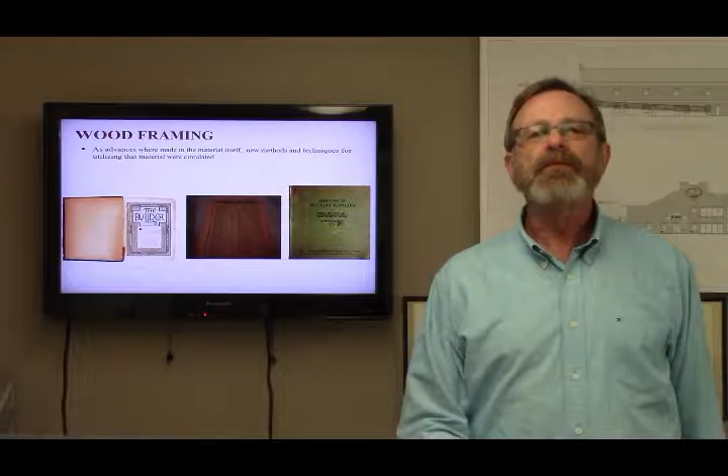As with most aspects of daily life at the time, the dissemination of information facilitated the advancement of many trades, including the building trades. In the building trade, the most widely adopted advancement was called balloon frame construction. However, while this adaptation had many advantages over more laborious and time-consuming building methods, it had one insurmountable drawback: an inherent design flaw which put its occupants in jeopardy.

Nonetheless, it is important to discuss balloon framing, as some structures still exist today. As building professionals, we need to be able to recognize the framing method and understand the implications of working around the potential hazards. Remember, it is our duty as licensed professionals to, above all else, including above the interests of our own clients, protect the health, safety, and welfare of the general public.

Just as an accountant uses mathematics as his language to communicate, chemists use formulas, and a mathematician uses equations, as building professionals we have our own vocabulary within which we need to be conversant. Today, we will speak the language of wood frame construction, with its own elements and descriptive notations.

There are a limited selection of woods which have the strength to live up to the stressing demands when incorporated into a building as a structural element. Not all trees are created equal.

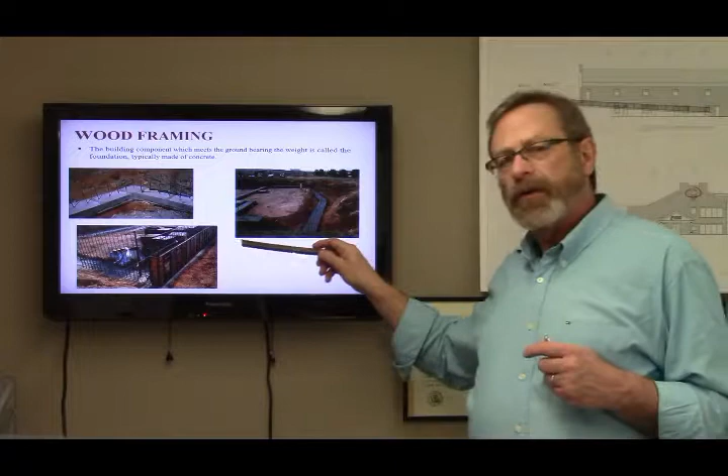You can see in these slides that there are reinforcing bars projecting out of the footings. They will tie in the foundation wall, whether it's of a basement or a cellar, or just a plain concrete slab on grade. These are the reinforcing bars we spoke about in an earlier module. They come in various lengths and are cut on the job after being positioned into the concrete before it is poured.

In our New York metropolitan area, the line in the ground below which the earth does not freeze is about 4 feet. So we see that the footings always have to go below the frost line, so they're not subject to heaving, pushing up, and settling, going down, with the fluctuation of temperatures, particularly in winter.

Here's this grid. It shows the grid of the reinforcing bars. They're set into where the concrete will be poured, at those points where the engineer has identified that there will be tension stresses on the concrete, and as we know, the concrete will not withstand much tensile stress.

If the excavation is also above the water table, the space excavated could be designed as good usable space. So here we see a basement. Here's the grade up here, and we've dug down below our frost line, but also enough to give us headroom in a basement, and we still haven't penetrated the water table.

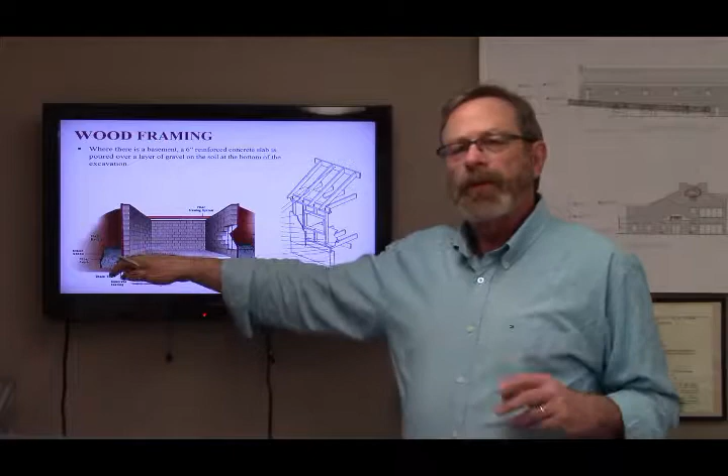The water table may be here. It may occasionally rise, and there are some drain tiles or drain pipe with perforation, which will allow that water to go into those weak areas and be brought away to an area below the level of the basement floor, so that the water, if any, could flow downhill because of gravity and then somewhere out into an open area where it will dissipate. Hopefully not into our neighbor's yard. That would be problematic.

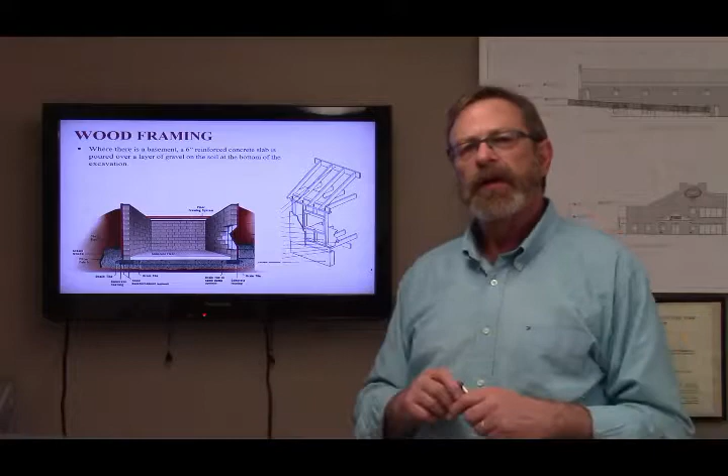You can see here that the concrete floor is sitting on undisturbed or virgin earth, which has been compacted over the ages by natural forces. The house structure itself, the exterior walls, are sitting on that foundation wall. These are the foundation walls, and they're sitting on the footing. The footing is giving the weight a little spread, maybe 2 feet, for heavier loads maybe more. The footing lies horizontally on the earth and absorbs the weight from above, dissipating it into the earth below. Those footings are concrete.

We talked about concrete being a combination of cement, water, and aggregate. Here you can see the aggregate is stone. This is typical concrete, maybe for a sidewalk or a foundation wall. Here's a piece of concrete where the aggregate is much more pronounced. Maybe the architect or designer was trying to make more of a statement, but they're much more visible, and they do have some kind of attractive expression of the compositional makeup of the concrete.

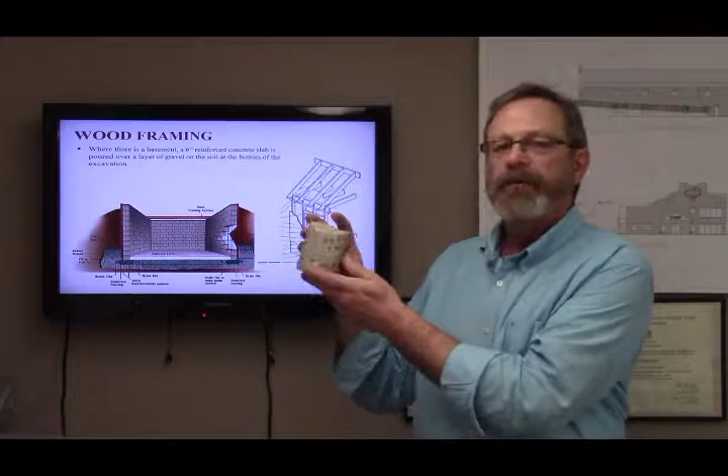Finally, I have a sample of a portion of a cylinder. We talked about those cylinder tests when we discussed concrete, and I wanted to show you this piece of a concrete testing cylinder that did fail ultimately. We were able to track from that the loading capacity of this concrete, that it met the engineer's specifications and our expectations. You can almost see that there was a piece of rebar here—it just left its mark indelibly into that concrete.

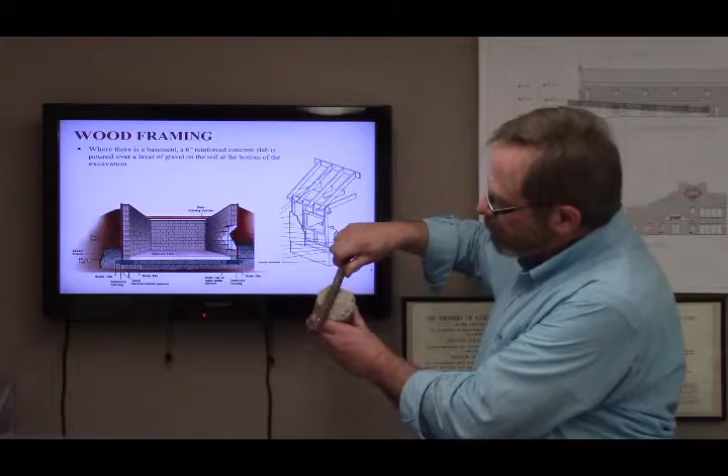He can also tell that this is undisturbed virgin earth, and then they start their excavation. He probably has some knowledge of the color of the earth being indicative of undisturbed earth. He may have also had a soil engineer come out and do some test borings or test digs to see what level the undisturbed earth could be expected at.

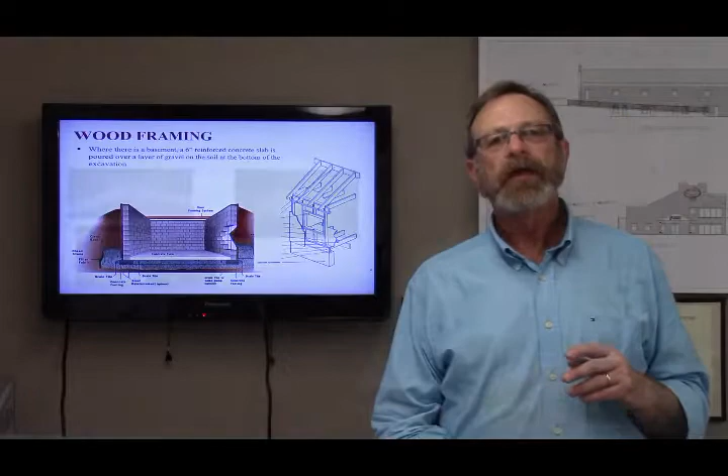At this point, the excavation has begun, and the ground where the footprint of the building will be located is leveled to the elevations that are needed. Once that field is level to just below where it needs to be to pour the footings and the concrete for the cellar or basement, the footing is framed up using wood members. The steel reinforcing bars are put in place, held by wire, and the first stage of the concrete pour for the house begins.

But once that foundation wall is poured above the footing and the height of the first floor is established, we install what's called a sill. The sill runs around the perimeter of the exterior of the building or house, and it's secured using anchor bolts or other types of straps to that foundation wall.

There's always included, before you put the wood sill plate on the concrete, a shield, whether it's styrofoam or metal—it's a wood-boring insect shield. It prohibits wood-boring insects from getting from the ground to that first piece of wood called the sill. We don't want any insects eating away at that sill; it would undermine the structure of the house. If those sills were to rot away, the house would start to lean to one side, and many older houses do have that as a problem.

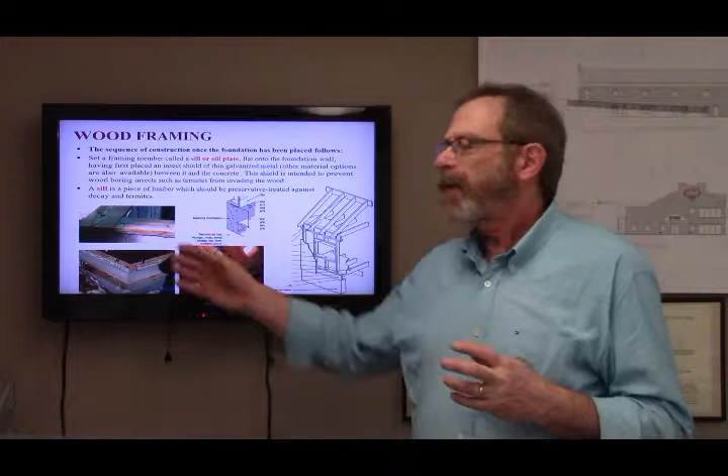Today we use what's called pressure-treated lumber. This means the lumber will remain unaffected by moisture that might be in the concrete from rain or driven wind. I'll show you here a sample of wood that's been rotted away—you can see it's pretty ugly and has lost its strength. We need to prevent that from happening, because the sill plate is what's going to hold the rest of the house securely down and in place.

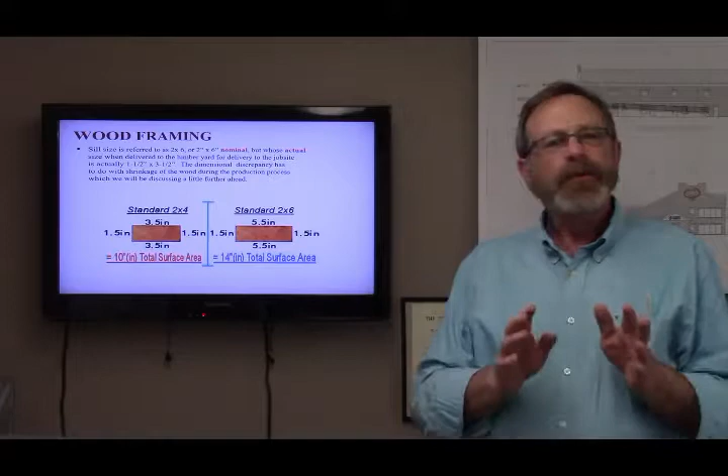We will be discussing wood shrinkage later in another module, but for now, because of the method of harvesting lumber as green or wet lumber, and the need for that moisture to be removed to stabilize the wood size, we have to account for the difference between the harvested actual wood size and the seasoned wood size.

Once the moisture is driven out of the wood, we call that seasoning, and because of the loss of moisture, the wood shrinks. So for now, let's say that when we harvest a standard 2x4, after it's seasoned, it becomes a 1.5 by 3.5 inch piece of wood.

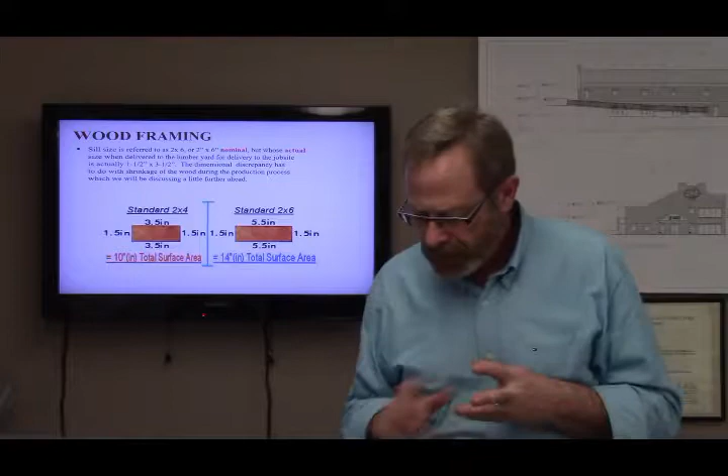We refer to it as a 2x4, but in reality, because that's the size that gets delivered to the job, we design around a 1.5 by 3.5. Here is what we call a 2x4, which comes in different lengths we'll discuss in the wood section in another module. But when it's harvested, this is a 2-inch dimension and this is a 4-inch dimension.

In the old days, that was what they would cut and harvest, and that's what would be delivered to the job. But the house or building, because of the shrinkage over time of the wood in dry weather, and then the expansion of the wood again in moist seasons, would cause the house to move, groan, swell and shrink. So there was movement, cracking of the plaster, expansions and contractions that became visible, jeopardizing the actual structure, and also very unsightly.

So we have what's known as a 2x4, actually being 1.5 by 3.5 for purposes of drawing and understanding how the construction goes together. We have a 2x6, which is actually 1.5 by 5.5, and different sizes after that. Here's a 2x10, it's actually 1.5 by 9.25. I say 9.25 because after a 2x8, the increase in shrinkage goes from a half inch to three quarters of an inch.

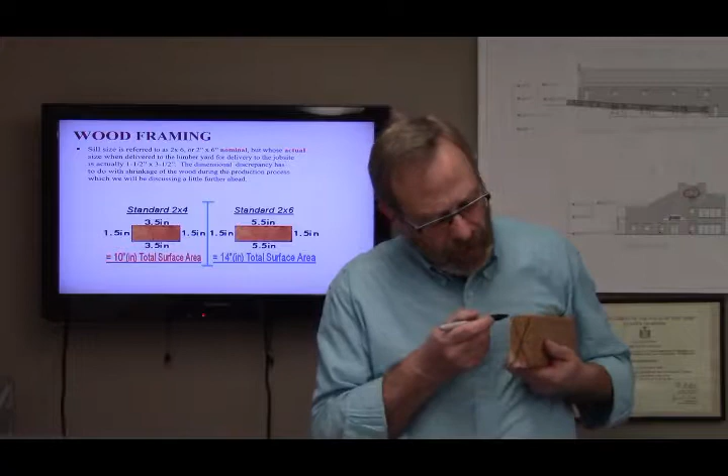So we take our drawing and mark an X at the end of it. That way we know that's the end of the material. We're looking at it in section, we're not just looking at something blank right here.

The same is true with other size lumbers. I don't know if you can see there's a red X here. So when we're looking at it face on, we're not just seeing four corners or four edges, but it makes sense that this is actually not a void, it's a solid.

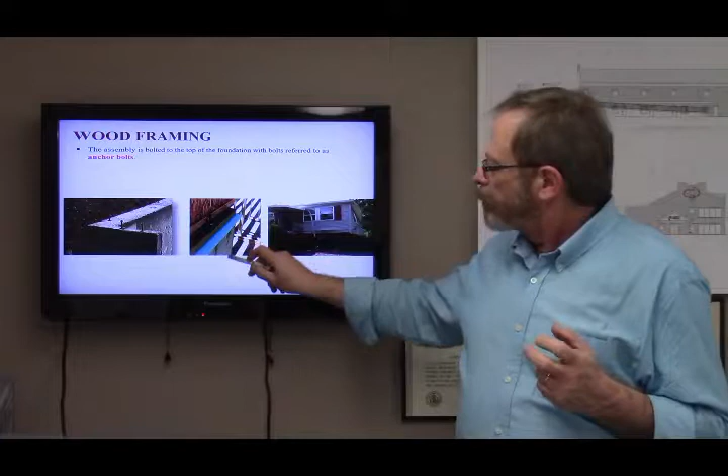Here's the foundation wall, here's that insect shield, here's the pressure treated sill plate, and here is the anchor bolt. There's a nut on the top there. That sill plate is secured down, and then the wood framing of the house is going to truly begin.

You can see here, this house has been literally blown off its foundation because the sill plate had rotted.

The sill plate is typically a 2x6, which we said was 1.5 by 5.5, laid flat on top of the concrete foundation wall. Where those anchor bolts occur in the concrete, we drill out a hole, typically a half inch, lay that in, the bolt goes through it, and the nut goes on top, and that's where the rest of our wood structure can rest. Here's the anchor bolt, here's the sill plate, here are the exterior walls.

It used to be, before the energy codes were developed in about the 1970s, that the plate around the perimeter of the house was only 2x4s. Here's a 2x4. But after the energy codes came into effect, we had to go with 2x6s, because the insulation required in the exterior walls to keep the house thermally protected could not fit in a 2x4 wall, only a 2x6 wall. So the sill plates became 2x6, and so too the studs that sit on them.

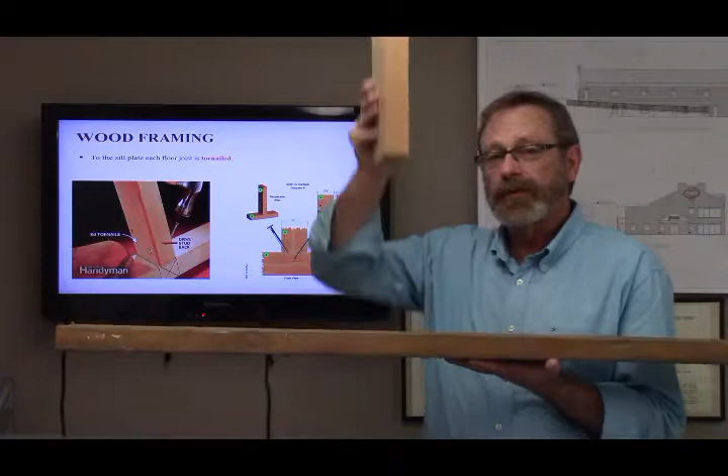On top of that sill plate, for the exterior wall, we put studs. The studs go upright and form the exterior skeleton of the house. The stud, which forms the wall, sits on the sill plate and is toe nailed in. This is how the toe nailing is done, nailing from each side.

A nail from each side is driven into the top of the studs at the plate above, because there's a top plate directly above the bottom plate, and into that stud through to the plate, whether it's the top plate or the bottom plate.

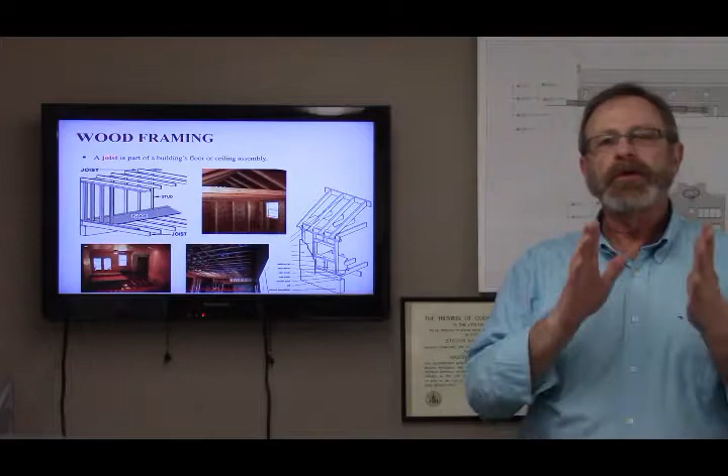So I mentioned sill plate, and I mentioned briefly studs, which I'll talk about a little more. I do want to jump though to the joist. The joist is a joist irrespective of the structural material it is made of, whether it's a truss, wood, steel, or concrete.

So our foundation wall, our sill plate, and sitting on the sill plate are the joists. The joists are the framing members that span from wall to wall, making either a floor or a ceiling. The ceiling can be the level below the attic, or it could be your first floor ceiling making the floor of the second floor.

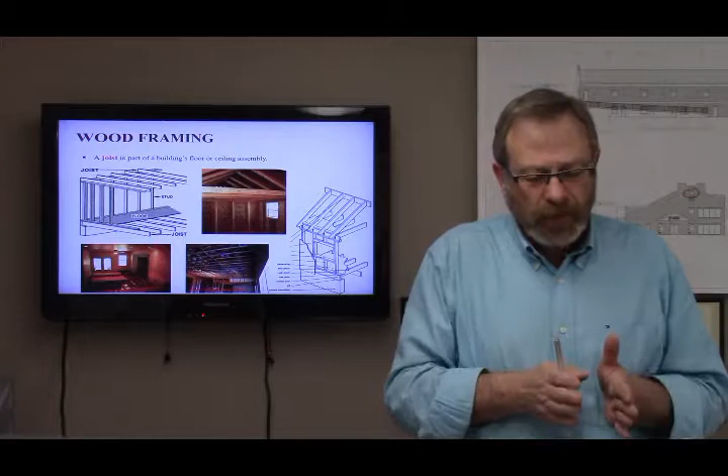Once our joists are in place, they're placed every 16 inches on center, 16-inch being a standard that everyone in the trade knows. 4 feet represents the size of gypsum wallboard as well as plywood. So if we space our joists every 16 inches, we'll be putting our gypsum board on the stud wall, or our plywood flooring onto a joist. If we center that piece of board in the middle of a stud or a joist, we've established a 16-inch rhythm.

So the board, gypsum or plywood—and plywood I'll talk about a little more, it's this striated wood you might be familiar with—will be able to share the first joist and screw down our plywood. 16 inches later, we'll screw our floor down again. 16 inches later, we have another place to screw our plywood down. And at the end of the third, 16 times 3, that's 48 inches.

We should hit another floor joist squarely in the center, so we can screw the edge of our gypsum board for the wall, or a piece of plywood, again 4 feet wide. We can always find the joist or the stud to screw into. So 16 inches on center, meaning on center of the object to which it's going to be screwed, is a common dimension that every tradesperson understands.

So here we see these floor joists. We know that they're all spanning from wall to wall, or wall to center span, where there might be a beam or a girder supporting the other end. 16 inches on center, and on the face of them, just on the outside edge of the sill plate, is toe-nailed a band. It's called a band, and you can see it here, which finishes the cavity ends of each of those floor joists.

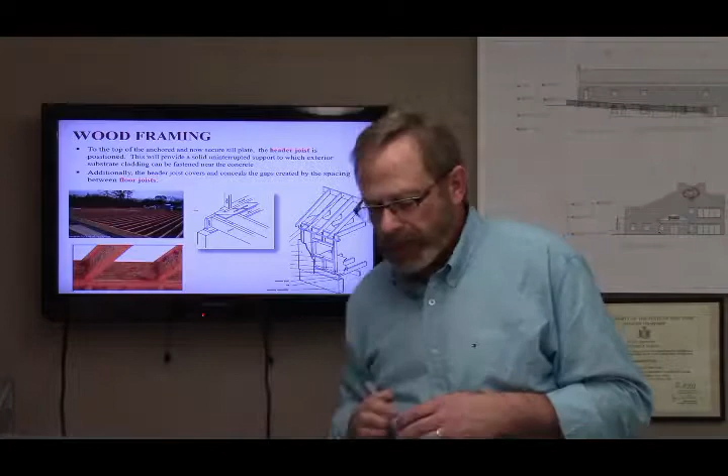So here's a good example. These joists are made up of wood I-beams—we talked about the I-beams. You can see here, if this is a 2x12, this also is similar in height, but we know that whereas this can only span maybe 15 feet clear span, this could maybe go 25 feet or 20 feet clear span for only a little extra depth.

So we can play our hand either way. If we don't care about the span so much, this is going to be less expensive. If we do care about the span, this is going to be only slightly more expensive. But if our design calls for openness, this is what we'll go with, because the other option won't give it to us. Our walls will have to be closer one to the next, or we'll have to have an intermediate column support.

Before I go on, I just want to show you in this diagram the foundation wall, the sill plate, the band, and the joists, all framing on that sill plate. And then this is now a platform for installing our subfloor.

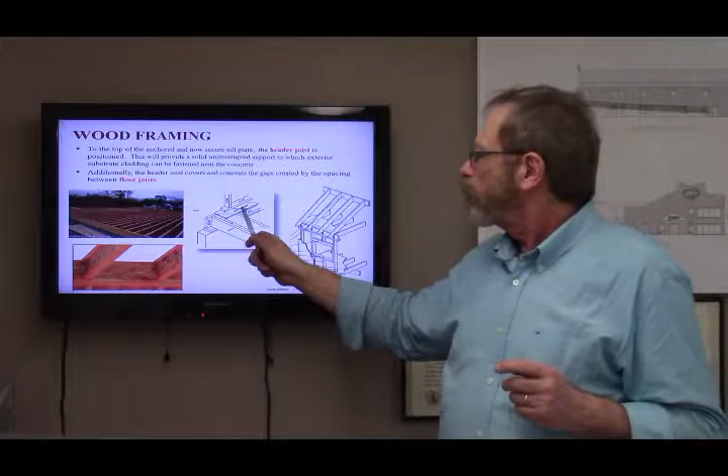Our subfloor is typically going to be an outdoor grade of plywood. Plywood is, again, an engineered type of wood where there are different layers of wood chips or shavings that are formulated under adhesive and pressure to be a superior wood material. In older houses, if you take the finished floor off—whether it's carpeting or some type of finished wood floor—you're going to see that the subfloor was made out of strips of lumber.

Not as good as today's materials, but certainly good. Depending on the condition of those subfloors, if you're doing a renovation, you might want to take up that subfloor altogether. We're going to see some pictures of rotted subfloors and where you would want to replace with modern material.

The word joist, just as our other vocabulary words we're being introduced to here, is a term of construction jargon. Whether it's made out of wood, whether it's made out of metal, whether it's a truss, they're all called joists. It's often desirable to have a space uninterrupted by support columns or walls, just a space of vast expanse.

Perhaps this is one of your clients' requests. In our crawl space, which I talked about earlier, we do have an intermediate post. We don't really care because nobody's occupying the crawl space.

So as I said, it's often desirable to have a space uninterrupted by support columns or walls, just a space, a vast expanse. Maybe we are having a living room or a great room. We just don't want any interruptions. So we use our engineered lumber for those greater lengths that we need.

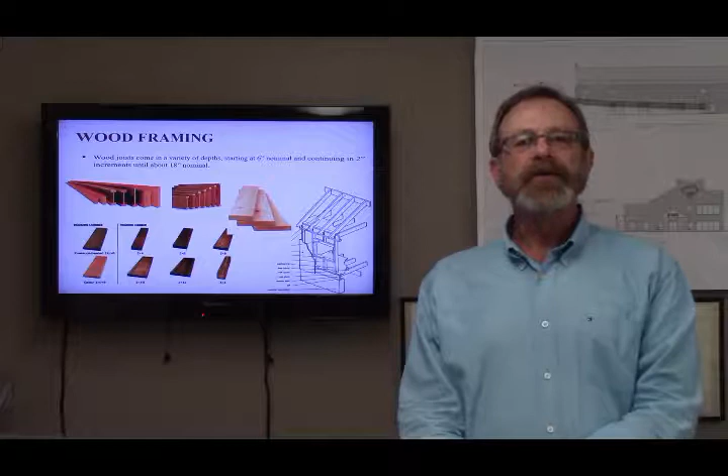Here's another example. If studs and joists are typically set 16 inch on center and a 2x is actually 1.5 inch wide, that leaves a cavity opening of 14.5 inches to accept the standard 15-inch wide insulation snugly. The insulation manufacturers understand this when they sought to establish the width of their product.

So I'm going to show you a piece of insulation. This is a nice piece of very manageable insulation. It's actually made out of recycled blue jeans. It's soft. They call this cotton armor.

We call this cotton armor. It's made, as I said, out of blue jeans, and it's eco-friendly. People can work with this with their hands and without a breathing mask. You're going to see some examples where other materials, such as fiberglass, are very unfriendly, feel terrible, need to work with gloves and face masks because you don't want to breathe in those fibers. Very scratchy, very itchy, very annoying.

I'd like to show you one more type of engineered lumber. This is called a glulam. It's basically standard pieces of lumber, like a 2x4, stacked one on top of the other. I hope you can see that. And glued together with an adhesive of superior strength.

This gives us another option for creating clear spans. And there are charts and calculations available and engineer reports as to how far some of these different types of manufactured lumber can span based upon their performance specification.

So let's continue through some of these slides. Here we see the wood available from the distributor. Your carpenter or yourself would go over, purchase the lengths of the material type that your job needs. You can see that many of the pieces may have some inherent imperfection.

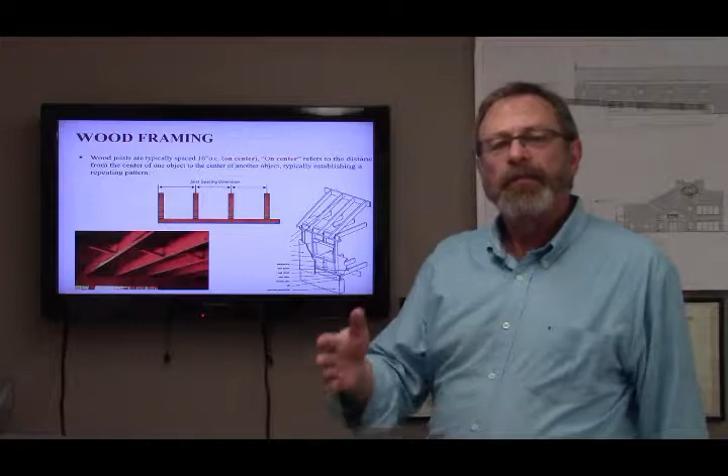That's a pattern that repeats. So when we talk about on center, we're actually establishing a rhythmic pattern. The longer the span, generally the deeper the joist, whether it's engineered lumber or regular lumber. The depth of the joist is what allows it to span the distance.

So when we have our joists 16 inches on center, or even our studs 16 inches on center, it creates the cavity. I told you before we could inset some insulation, but we could also inset ductwork, piping, plumbing, sewer pipe or water supply pipe, and wiring. Those cavities that are parallel to the joist are a great opportunity for insetting those mechanical systems.

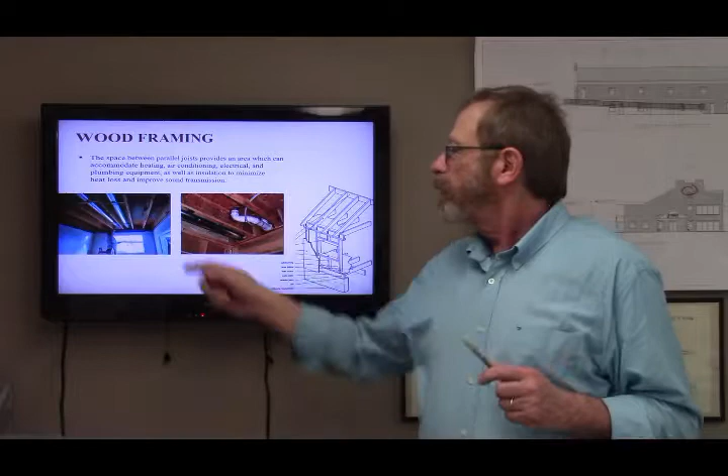What we said was that when we needed to go perpendicular to those joists, well, we have the neutral axis, so we can discuss with our engineers what amount of material might be removable so that we can run some of our systems perpendicular to those parallel cavities.

In addition to the sill plate or the girders on which our joists sit, we also have a code requirement of installing bridging. Bridging keeps the long lengths of the joist from twisting side to side. Bridging typically can be blocking, just a piece of board cut to the length of the cavity space, or cross bracing from another type of maybe smaller piece of lumber. Oftentimes they now have metal bridging.

So that joist layout will allow us now a working platform to start to build the rest of the house. The next step is to install the subfloor.

In older homes it might be strip planks side by side, but nowadays we use plywood. Plywood, as it comes in 4x8 sheets, is easily attached with today's use of a power actuated hammer, much like a shotgun. The carpenter's assistant puts in place a piece of plywood board.

Because of the system he's set up, 16 inches on center with the joists, he knows that as long as he puts his first plywood piece on half of the first joist, he only has to go every 16 inches on center. He doesn't even have to watch where the joists are, because basically they're hidden under the plywood—you can't really see them. But plywood boards do come with marks every 16 inches on center, so he can just follow the mark on the plywood.

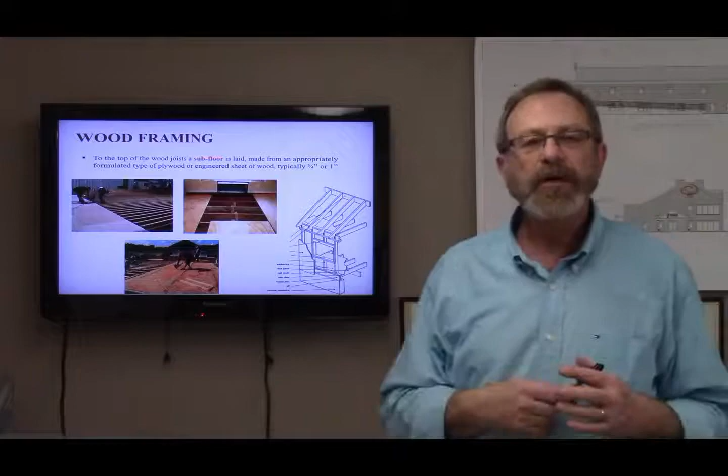Here they're laying down the pieces of plywood to do a good job so the plywood isn't going to squeak later as the subfloor.

The screws are really good because, for the same reason we talked about with screws and gypsum board earlier—but for the plywood they often use a glue caulk, put down first on the plywood, in order to secure it with more than just the screws. It makes a very strong bond, and if those screws were to become loose, there might otherwise be squeaking in the floor, and the glue would help nonetheless keep the plywood in place.

Here's a close-up of the power gun. We do have things that need to be left open in the floor, maybe a stairwell is going there, or pipe penetration, so it's easy to cut with a power saw.

Of course, there might be instances in the flooring where, because of penetrations that need to take place, the joists are sometimes not 16 inches on center. They might be less—generally they're not going to be more.

This is that chalk line I was talking about. This is a chalking tool. You put colored powder in there. One person stands on one end with the dumb end, as they call it, of the chalk line, and the other one holds the chalk reel itself. It's a snap—it's pulled taut, one guy here, one guy there, or sometimes they have a little hook so one person can do it themselves. You hold the chalk taut and you snap it.

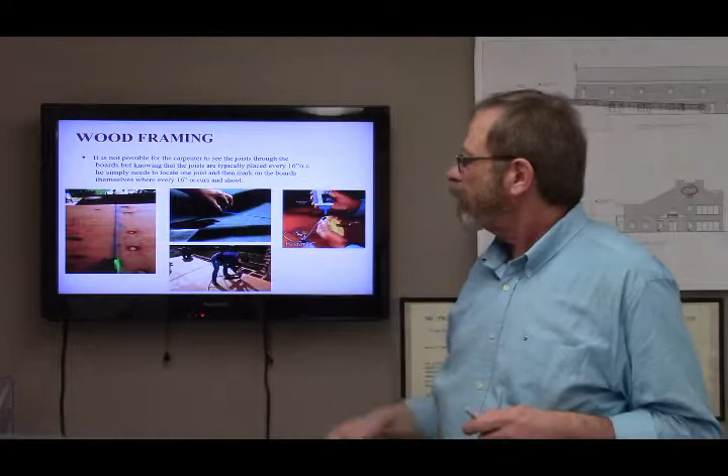Here's the guy snapping it. When it hits the plywood, it leaves a very light colored line, and that's the line the carpenter with the pneumatic tool is going to shoot that plywood into the joist at that location. I talked about subfloors in older homes which were just boards.

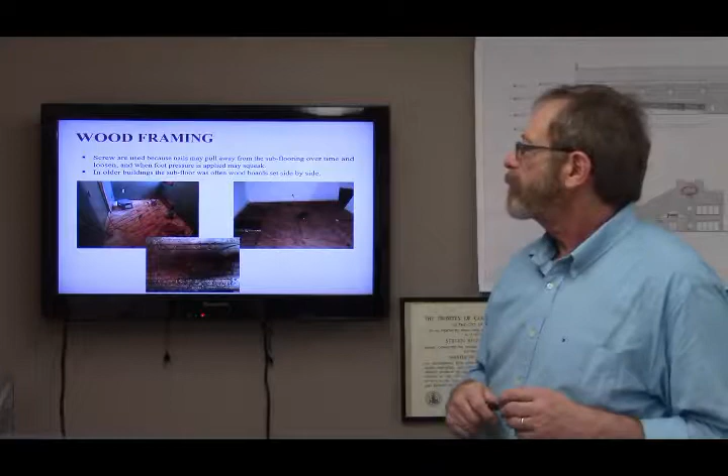Later to be covered with tile or carpet or some kind of finished floor. I wanted to show you that type of subfloor as well. In many worn locations, those boards might not be good anymore. Maybe this is an area under a bathtub that shows some wear, so you'd want to replace that.

You need a secure and stable subfloor on which to put your finished floor. So together with the joist, the subfloor becomes monolithic, acting as one large assembly. Oftentimes the plywood pieces might even come with tongue and groove edges. This is not plywood, but this is solid oak flooring, but they have tongue and groove. You can see the tongue and the groove, and they go snug one against the other. So in addition to the gluing and the nailing, this interlocking action helps the floor stay solid and keeps it from any movement and any possible rubbing or squeaking that would occur.

There is a 1/8 inch gap that is often recommended between the pieces of plywood, and even that is kept by that tongue and groove, which keeps a little distance for expansion and contraction of the plywood material itself. If it gets wet, it allows for slight expansion, because that plywood floor, before the rest of the house is there, is most likely subject to moisture, rain, or other humid conditions.

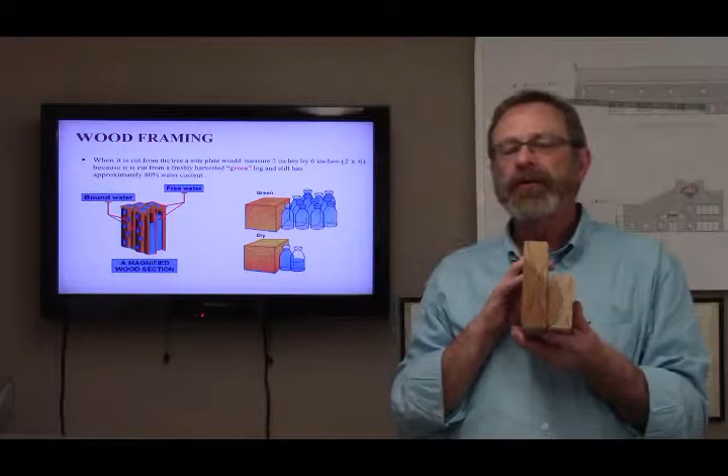I mentioned earlier about the moisture content of wood and the drying seasoning of that wood, accounting for the actual size of a 2x. We're going to call these pieces, whether 2x4, 2x6, 2x8, 2x10, or 2x12, simply 2x's, because for our purposes they will already be in place. It doesn't matter whether they're 2x6s or 2x10s, so we're just going to notate them on our drawings as 2x's.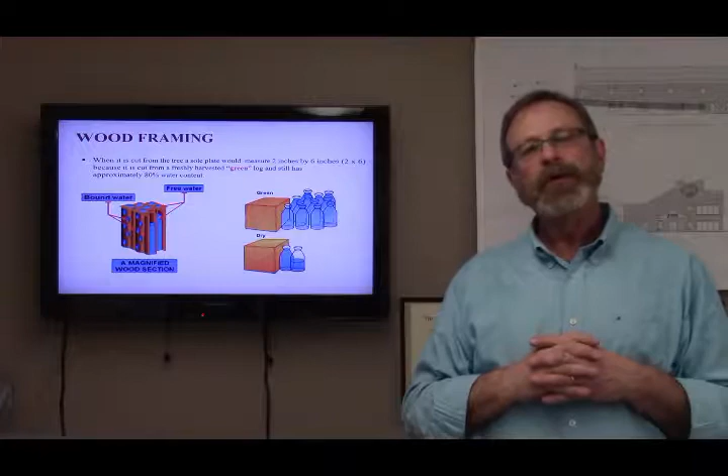This is just to show you what happens to that wood because of the moisture content when it's green, when it's first harvested, and after it's been dried. We want it to be dry to about 20% moisture content, because at that point our building is not going to be subject to expansion or contraction of the wood material. The wood is seasoned, and it's done in two fashions: either in a kiln for quick drying, or air dried.

Here again is the real moisture content in that freshly harvested log. As I said earlier, up until about 6 inches, the amount of shrinkage in the lumber is a 1/2 inch in the width and a 1/2 inch in the height. Once you get to a 2x8, it increases to 3/4 of an inch in the height.

Here's the exterior wall of this house. This slide is simply showing what I had said earlier about the width of the exterior walls going from 2x4 inches to 2x6 inches, to accommodate the depth of the thermal insulation that goes in those walls, as required by the newest energy codes.

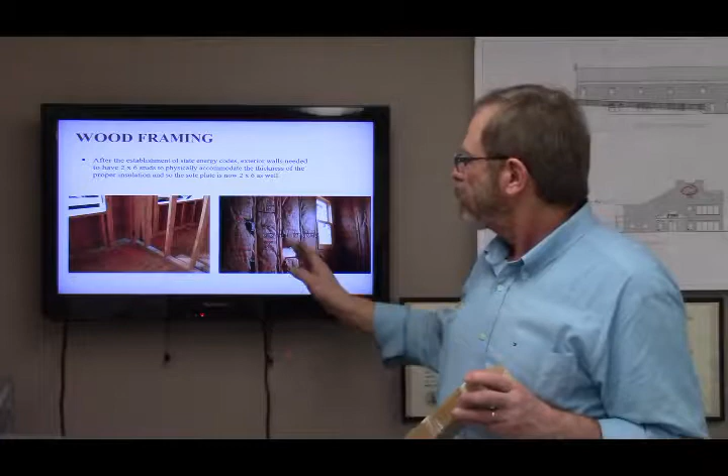Interior walls, however, could remain 2x4s, and often do. We can still put some insulation in there if we want sound attenuation between, say, a bathroom and the dining room. We're going to talk more about that when we discuss acoustics. But here I want to show you the insulation secured between the studs.

The inspector will come out before the sheetrock can go on and inspect the insulation. He's already come and inspected the installation of the 2x's, as well as the foundation and the floor. The next step after installation of the 2x's was to put the insulation in, and that's an inspection the building inspector will come by to do before he allows you to continue and cover up those studs and insulation.

Just some more construction pictures to give you an idea of how the openings occur for windows. We also have similar openings for doors and other types of pass-throughs. You'll notice that at those openings, the studs are doubled up to give some extra rigidity or stiffness to the wall. It also shows you here that the walls can be created on the ground and lifted into place, or they can simply be built in place.

This gentleman has built partitions on the ground. He's going to lift them up into place and secure them into the sill plate. It's sometimes easier, as you can imagine, to build the partition if it's light enough to be pushed up into place. It's much easier to build them on the ground—you don't need a ladder, and the construction process can go a lot quicker.

So we have the sole plate, or the sill plate, also known as a sole plate, at the floor. This is true even at the interior walls. The same applies at the top plate, and in between we have the studs doubled up where there are penetrations or openings. The top plate is usually doubled as well.

So here's some interior partitions. You can see the sill plate, the top plate, and the studs.

Everything needs to be plumbed. They use levels and lasers to make sure the walls are plumbed. They're not always going to be 100% plumb or square to the ground or floor, and we'll talk about that concern in another module. But the framer, in this case called a rough framer, only needs to attain a certain tolerance, not as fine as the finished carpenter that's going to come to the job later on.

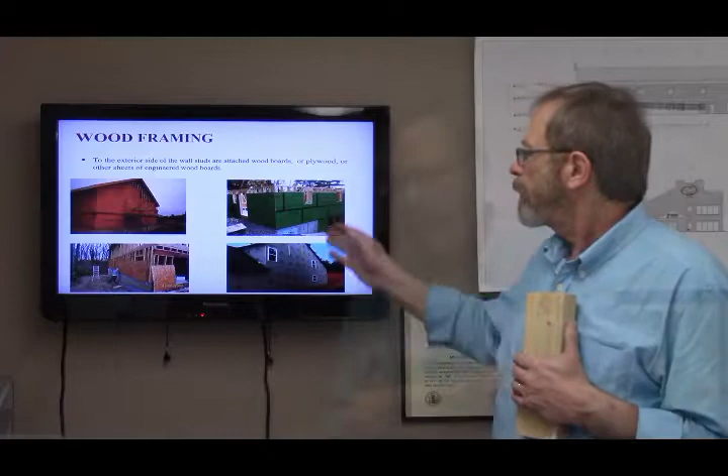So for the exterior studs, we cover those and enclose the space, making it weather tight with plywood exterior sheathing that is weather grade and prohibits the penetration of vapor, moisture, or wind into the house. There are ways to treat those pieces of plywood geared for exterior installation, and cover them with other treatments of wrap.

We call that house wrap, which covers that plywood. Here's house wrap. Once applied, it covers all those joints between the plywood and any other areas where the wood exterior of the house is not continuous, giving water tightness.

Over that house wrap will be installed the exterior finish material. We don't want to penetrate the house wrap with fasteners, so each of the exterior types of materials have fastening mechanisms which don't require penetrating the wrap itself.

So once the house is weather tight with the exterior plywood, the house wrap, and maybe some of the exterior finished material, we go back inside and apply the interior insulation everywhere there is opportunity for cold air or moisture to come in. We also want to not let the conditioned air on the inside escape to the exterior.

There's not that much we can do to prohibit the loss of temperature at that material, but there are some things that can be done, usually at a greater expense than a typical homeowner would want to take on.

You can see that the width of the insulation has been designed by the manufacturers to fit snugly within the cavity between studs, or joists in the case of a ceiling. We also need insulation at the ceiling of the top floor of the house, in other words the floor of the attic. Sometimes we actually insulate the joists which form the roof itself, called roof joists, but it probably makes more sense to enclose the attic at the floor.

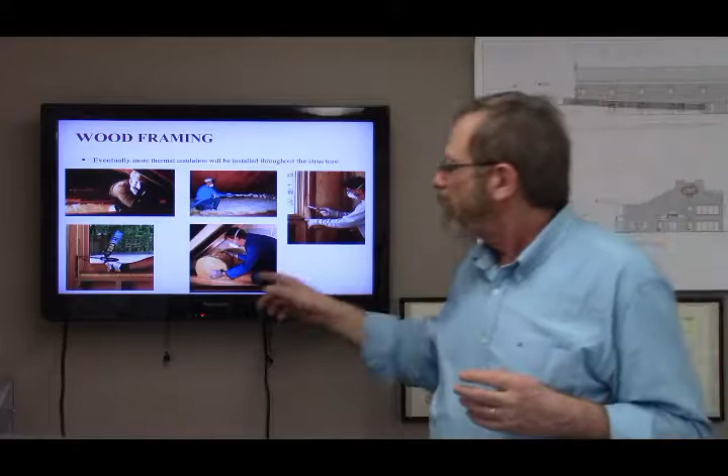Here he is using a knife to stick insulation in there, but it's probably going to leave some gaps and probably not going to be as well insulated as expanding foam would be. Safety precautions are taken here, using that type of insulation which is not user or installer friendly, so he's wearing gloves and has a mask on. He should maybe be using eye goggles, like these guys are using.

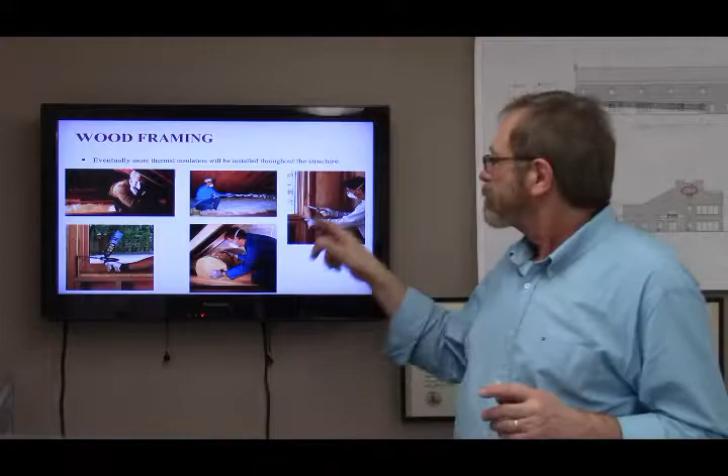Here's a better picture of a guy using a roll of insulation. That's pink insulation - you might know what company makes that. It's called Owens Corning. They have the Pink Panther as their logo, so their material is pink. This is called a roll of insulation. It'll beef up and fluff up as he unrolls it and installs it. Here's another roll, open, being installed. They have little flanges that cover each stud, and you staple those paper flanges to the studs so the insulation stays in place.

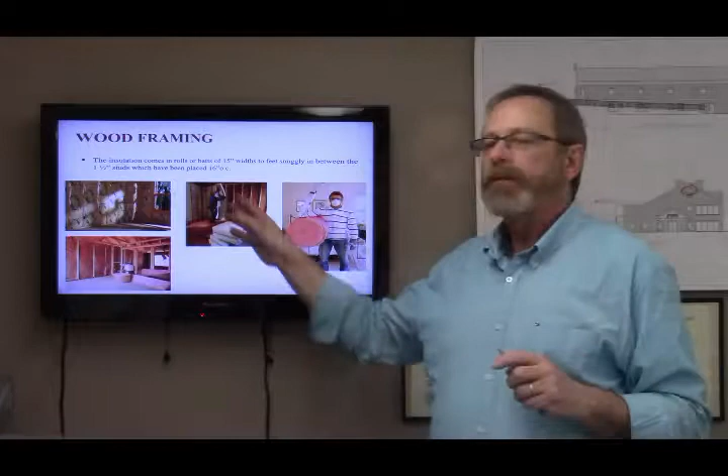These are batt insulations, and you install each one separately. Those insulation batts are stiff enough that you just stick them in the cavity and they expand enough to hold themselves up between the studs by friction. And once the gypsum board goes on, they're stuck in there and not going anywhere.

I mentioned that at openings we have a subframe. There's some terminology for those subframe pieces, but just suffice it to say we need to double things up. Even at penetrations of the roof, around skylights, the framing members are doubled up above a window and on each window side, as well as doors.

When we have those openings, we call the wood frame opening the rough opening. The rough opening is slightly larger than what the finish opening will be once the item, whether a door or window, is set in. So from the floor to the underside of the wood framing is the rough opening height, and the width from framing member to framing member is the rough opening width. We specify that as designers so the rough carpenter, who does the initial framing of the structure, knows what his responsibility is to leave clear.

The next installer, whether the door installer or window installer, will have enough opening - more than enough - to stick his door frame or window frame in. So the window or door framer, who's probably also the rough carpenter, doesn't have to struggle getting his item into place. We're going to talk about how you trim out the difference between the rough opening and the finish opening. There's a slight gap around that we'll need to fill, probably with insulation as well as what we call shims.

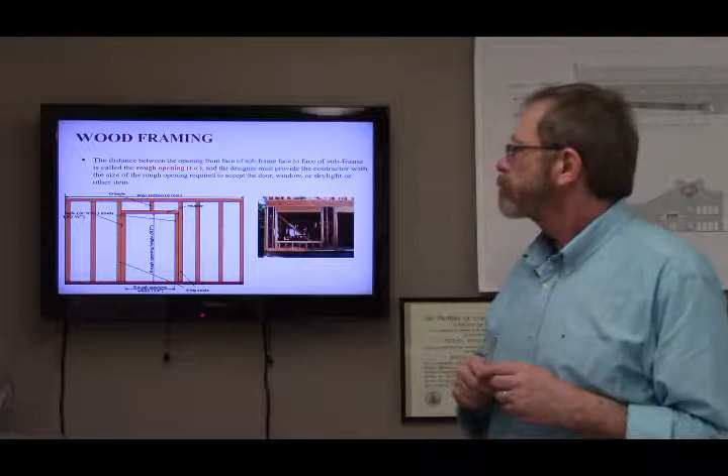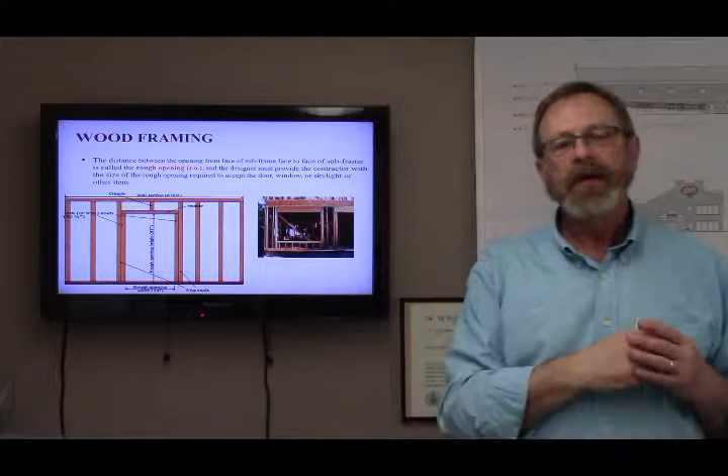And those shims will refine and make sure the door or window are perfectly square. The area above the rough opening is called the cripple, so we might have a framing member called a cripple above it to stiffen the opening. We might also have a regular 2x fit in there. So one way or the other, the load of the house above that opening needs to be spread to the sides of the opening, and that's another reason we have double studs at those openings.

So I said what the rough opening was, but I didn't quite say what the finish opening was. The finish opening is the dimension once the item is in place. Here is the frame around the door, and the finish opening is the actual inside dimension from the face of one leg of the door frame or jamb to the opposite leg. That's really the opening needed for the door or window that's going to actually go into that frame. So we have the rough opening necessary to give the rough carpenter, and the finish opening, so the installer for that element knows what we've allowed for the actual window or width of the door.

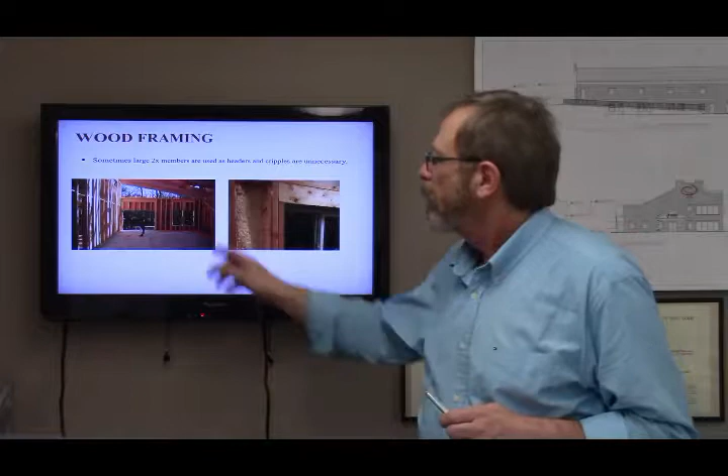I talked about the cripples above the door, or the likelihood of putting a header above that, which is just another 2x doubled up to run from side to side of the rough opening. So here's a header, and the rest of the distance for the height of the room is made up with cripples. More photographs of actual job conditions - you can see the double subframe, a full header above obviously a window, and some framing elements above some future window openings. Just at this stage I'm going to mention that these are joists as well.

They're roof joists, in the same fashion that floor joists are - joists which will be the platform for the resting roof structure on top of them. If the wall, once constructed, can be light enough to lift in place with one or two people, the framer will often frame it on the ground - much easier than getting on ladders to do it.

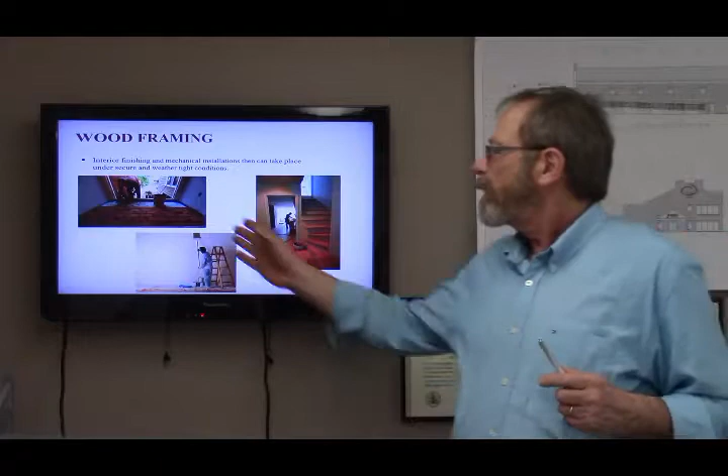Some more pictures of the job being formed out of prefabricated panels. Each panel is labeled to match a drawing set the manufacturer prepared for the installer. This type of construction still requires the same excavation and foundation work we've already discussed, and once framing is in place we still have to finish out the interior, including tape and spackling, flooring, and finish painting.

Just like our floor joists, we have roof joists, also referred to as rafters. They take the live load of precipitation - snow, freezing ice, hail - as well as the dead load of their own weight. They act with downward force that tends to push them out, flattening them like a pancake, so they're thrusting. This makes it a very important connection to restrain that thrust.

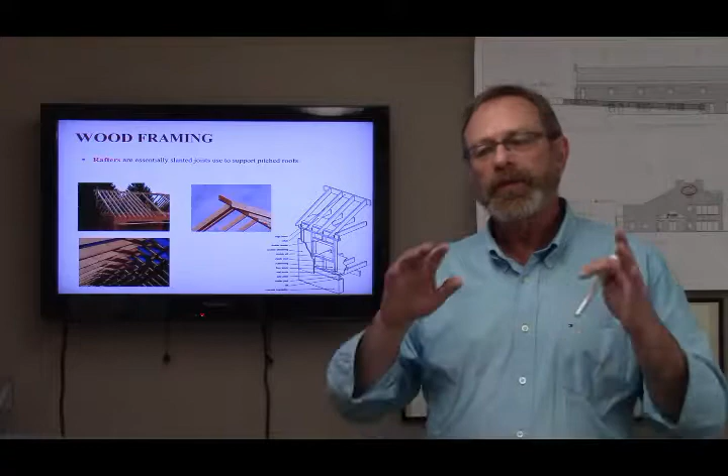We slant or pitch roofs depending on the expected load, wanting to shed that load quickly. We can build flat roofs with precautions, but in areas of heavy snow we generally want steeply pitched roofs, which cause snow to run off quickly and don't stress the house for very long.

We've already talked about the 2x situation. We refer to wood framing in terms of 2x because it's most likely already in place and doesn't generally affect our work as interior designers - though if we were the architect or engineer building the structure new, the 2x10 or 2x8 designation would matter. What we care about is not the individual framing members, but how much space is left after framing is installed - will we end up with an 8-foot ceiling or a 10-foot ceiling? We don't care how the structure got there, just that there's a piece of gypsum board, maybe 1/2 inch, on a structural frame that's a 2x something.

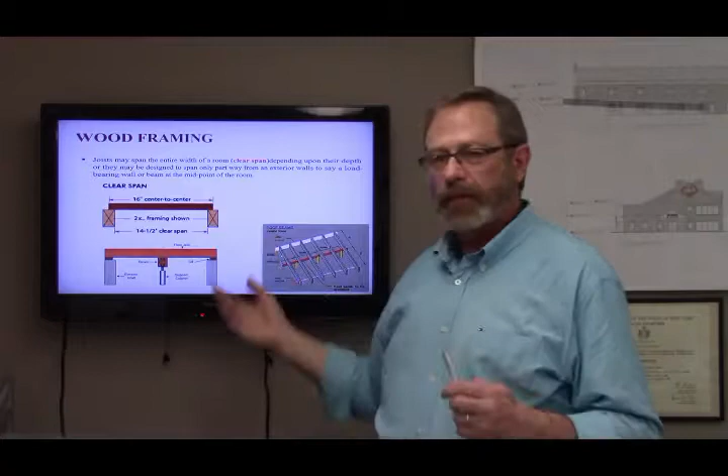We're here on the clear span. We can go from wall to wall, or perhaps have an intermediate beam sitting on a separate support. In the basement we often have Lally columns dividing the space since we don't care about clear span there, but on the second floor, say a great room, we want that room to clear span. So we need a framing member, maybe engineered lumber, that can span 25 feet or 22 feet clear - and that's more expensive than short spans, so we spend the bigger money where we want to make the impact.

So here's some rules of thumb. I'm not going to hold you to any of this, but just get an idea of the different spanning capacities of 2x's.

Where the roof rafters meet at the peak of the roof, we need to provide not a support for the roof rafters—because really they're pushing one against the other and restraining themselves—but just a board which gives them a positive way to be attached.

So they're nailed into that board, and this assembly is also made to allow air flowing from the eaves of the house up through the cavities between the roof rafters and out a little space just at the peak, covered by a cap that allows air to circulate in those attic rafters to keep air fresh and moving.

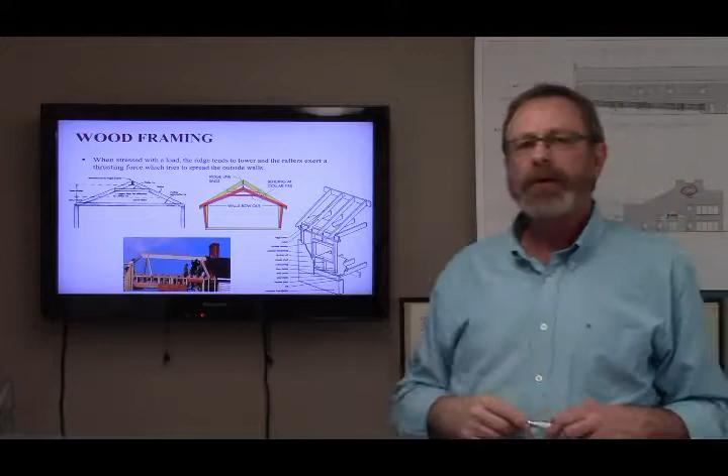Here's that instance where the weight on the roof, or the roof itself, is pancaking down, but the exterior walls need to restrain it. So that's a very important connection, and we can add collar ties. The collar ties will tend to give stiffness to that roof as well. But that exterior wall to roof rafter connection is very important to properly detail.

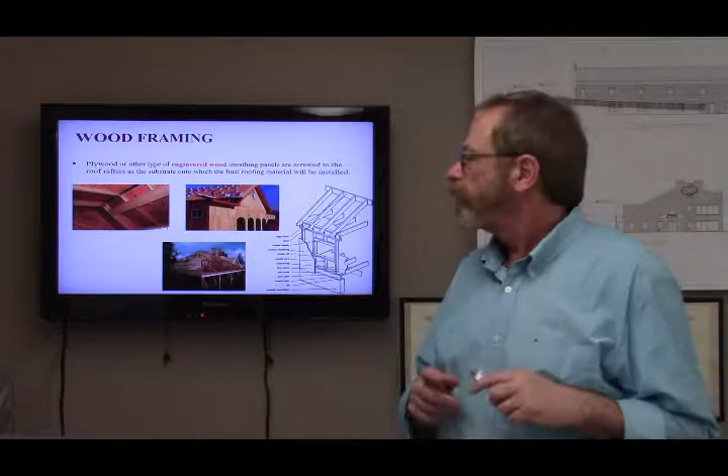Another slide for more parlance, for developing our vocabulary. So once our roof rafters are in place, we want to secure that exterior just like we did the exterior walls with the appropriate plywood, which will be our substrate onto which our finished roof material will be applied, whether it's asphalt roof or Spanish tile, whatever it is. We want to make sure that roof is weather tight.

Take a minute to look at this slide and make sure you understand the definition of engineered wood, as we've been discussing. I talked about how some plywood boards come with tongue and groove attachments. They don't all do—you pay a little extra for that. Maybe the security of that positive fastening is less important than the budgetary restraints of your owner. It's a nicety, but your project can still survive very nicely without implementing that expensive detail.

Plywood comes in 4x8 sheets for the reason that it's easy to lift into place, and it's part of the rhythm of on-center placement of materials in construction.

It does come in different thicknesses. Here's a quarter-inch piece—you can see the different layers on the edge of the boards. Here's a larger piece, three-quarter inch plywood. Three-quarter inch is very stiff; we use that width very often for substrate for the flooring. Quarter inch might be more appropriate to architectural millwork, maybe cabinetry and such.

So once that plywood is on the roof framing, we're going to put tar paper. It's referred to as tar paper in the field—it's bituminous sheet paper, heavier than paper, but this is it. It's flexible, comes in rolls, and it's overlapped and laid on the plywood to give a separation between the shingle, which is going to get wet in the weather, and the wood. We don't want the wood getting wet, because eventually it may start to rot.

So this paper is overlapped, so water will run down it and not get into the seam. The next sheet will lap this one, and this one laps that one—not the other way around. We don't want it reversed, or water will get under the sheet and just get the plywood wet again. Here's what I'm talking about: this sheet laps this and this one laps that, so that overlay is not a place where water will get in. If it was reversed, water would get right in under the lapping.

There are special roof nails that are appropriately designed and finished to prohibit water penetration through any nail holes as well as rusting. This type of assembling of individual pieces is called stick framing.

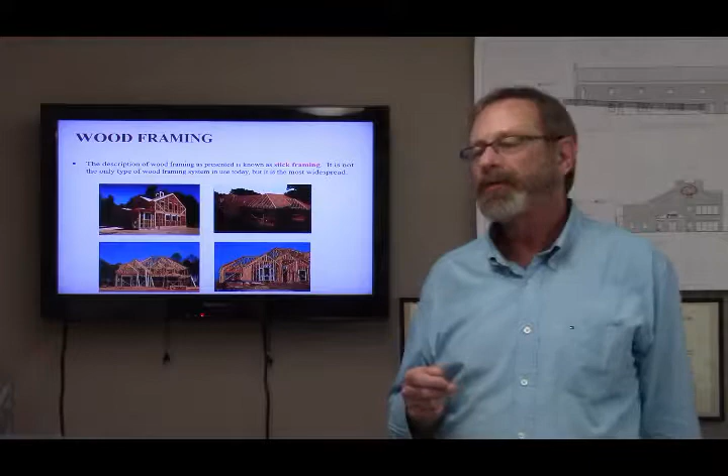There's a great link to a YouTube video that I put in our module that I recommend you look at, and then it's funny to follow up with the other link I have in there, which is stick framing using popsicle sticks. I encourage you to take a look at those two links. But essentially this type of individual piece framing is called stick framing.

Wood stud wall systems are economical and widely used. There are some other framing systems—you can buy modular framing systems where you pick a plan or design and the manufacturer will adapt his system to your taste, whether it be post and beam, plank and beam, pole construction like a barn, or other types of timber construction. These systems are economical and widely used. They provide excellent structural performance, make use of relatively inexpensive basic materials, and permit the application of many of your own choices for finishes, and are adaptable to practically any method of on- or off-site construction.

So I said that the rough carpenter is the guy who's got some liberty with the tolerance within which he needs to frame, as long as the walls are plumb and the structure is sound. So the wood construction we've been talking about so far is called rough carpentry, and the guy doing the work is the rough carpenter. He has very few tolerances within which he has to build, other than that the quality of his work needs to be within industry standard and the reasonable expectation that it's plumb, square, and sound.

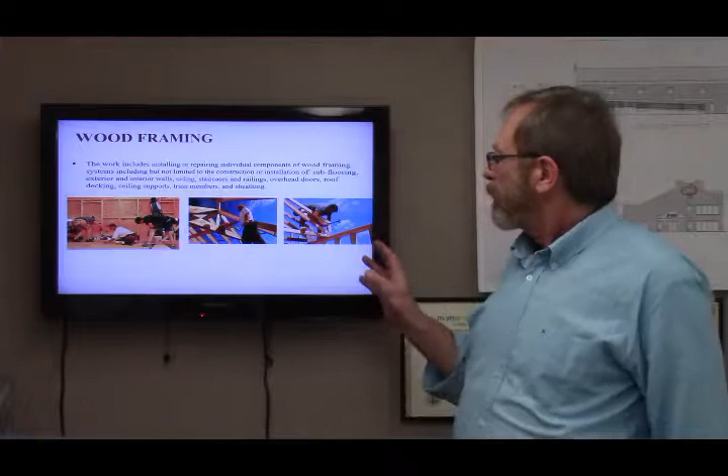These are the guys that use the bulky tools like power saws, drills, and pneumatic hammers. Their work for the most part is not going to be seen. It's the stuff in the walls that as an observer you don't really consider very often. It's the work applied to their work that we see and consider as the real aesthetics. Here's some more views of the work going on, whether it's subfloor, exterior or interior walls, staircases, overhead doors, decking. These are the guys that do the hard labor, often under inhospitable weather conditions.

Installers who come after the gypsum board is on, and things start to become the visible elements of the house, are the finish or trim carpenters, such as the base molding, cornice molding, chair molding, cabinetry, staircases, stair railings. Those elements that we see and think of as the aesthetic end product of our idea are the finish and trim carpenters.

These are some samples of finished work. I said base molding, fireplace surrounds, cabinetry, paneling, staircases, etc. They work within very small tolerances, and we'll talk about that during another module.

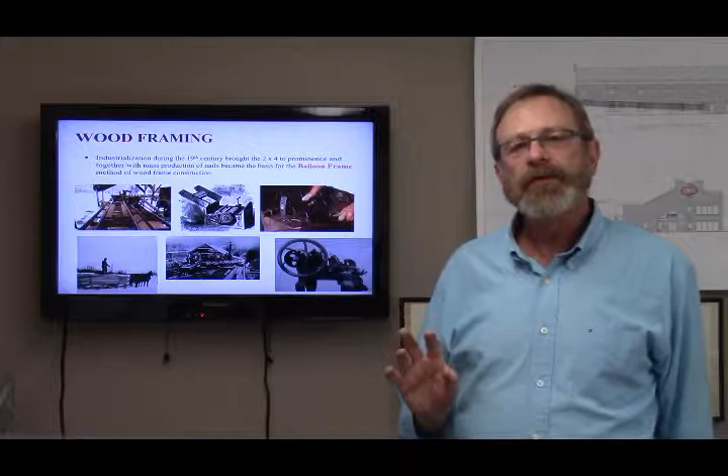I started the module by saying that during the 19th century, with industrialization and the prominence of mass production of building materials, there was a style of building that was favored. It was called balloon framing. So harvesting of lumber no longer came from your own property. You no longer had to trim and dress your own material and create your own wood joinery. But as I hinted at before, this balloon framing had an inherent issue which wasn't immediately obvious at the time of its popularity.

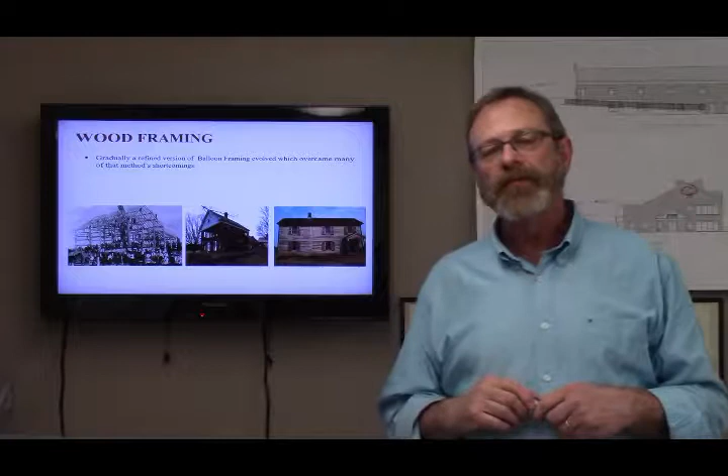The solution to the problem of balloon framing came through a method of trial and error, ultimately given the name Western platform framing. Western platform framing accounts for roughly 80% of the framing done in the United States, primarily because it's the main framing used for homes, and homes are the most popular type of building structure in the United States.

Balloon framing was introduced in Chicago in the 1830s and got its name because, in comparison to the former type of timber house construction, it looked much more light, like it was going to float away. In balloon framing, the exterior walls ran continuously from the first floor all the way up through to the roof structure itself. Hopefully you can see from these slides that the outside stud walls ran from the first floor all the way continuously up to the underside of the roof.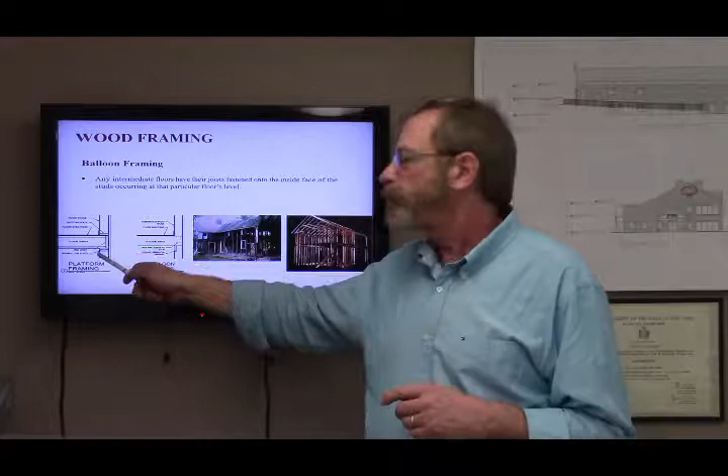So what was invented was platform framing, where the floors were framed through the exterior walls, and the floor joists would actually sit on those exterior walls. So now we had, at each floor level, an interruption of that cavity and a slowing down of the spread of smoke and flame to the floors above. That's platform framing, creating a platform for each floor that sits on top of the exterior walls.

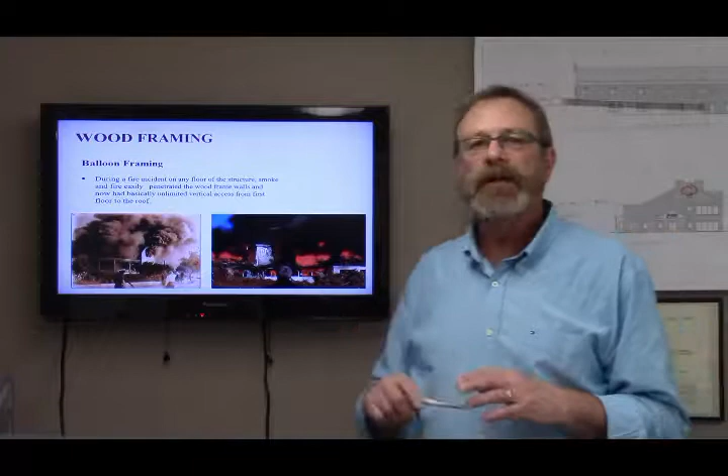So knowing this now, as I've said, you can look at these photographs and understand why that was, from the start, going to be problematic and ultimately devastating to the houses and their occupants. There are some photographs showing exactly the catastrophic implication of balloon framing.

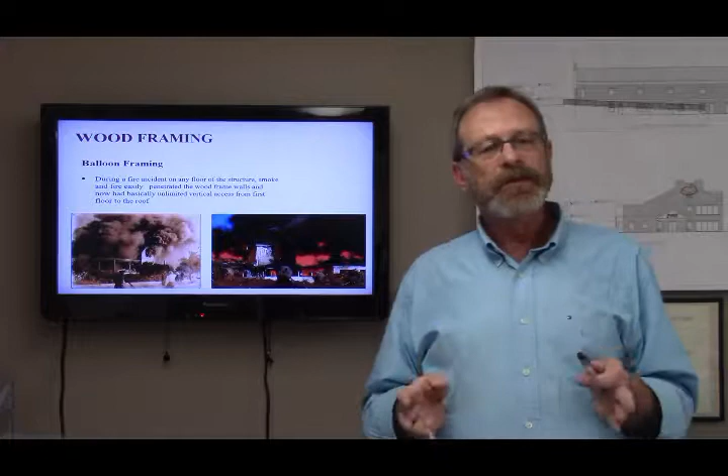Now, we don't do balloon framing anymore for these obvious reasons, but that's not to say you might not do a house renovation somewhere, a house adaptation, or adaptively reuse a house, or do a historic preservation where you might find this complication. So we are at a point now where we can recognize the shortcomings of this type of construction and say to our owner, this is a problem, needs to be rectified, there's no sense in going forward until we settle this issue, which is actually an imminent danger to the occupant or owner of that house.

Here's an illustration of that chimney effect, just like we have in our own fireplaces nowadays. It was with this type of construction in the backdrop that the Great Chicago Fire of 1871 was catastrophic to the city of Chicago. There was no controlling the spread of the flames, particularly because the houses were so close together, they just jumped from one to the next. And the balloon framing certainly did not help the situation.

When the builders realized the shortcomings of this type of construction, the municipalities began to adopt building codes. And building codes did, and still do, become reevaluated and updated when a new hazard presents itself. These advanced techniques were developed not just in Chicago, but throughout the country.

The term platform framing comes from the fact that the platforms of each level interrupt that exterior wall and become a fire barrier to the spread of fire and smoke. So fire and smoke could temporarily be contained to a small area during which rescue operations or fire damage control operations could take place more speedily.

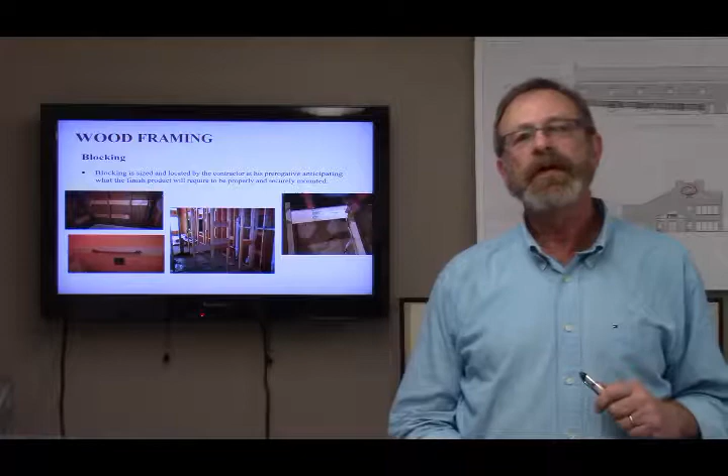As interior designers, we say blocking as required. We don't tell the contractor where the blocking goes. It's his responsibility to understand that certain things that are going to be installed need blocking. We don't tell him where to put it, we only say blocking as required. It's his job as the builder to understand the needs of the other trades with regards to securing a shower head or a faucet, as well as to understand that the cabinets, vanities and things like that ultimately need blocking behind them. So we say blocking as required. We don't specify the size of the blocking or per se where the blocking is to go.

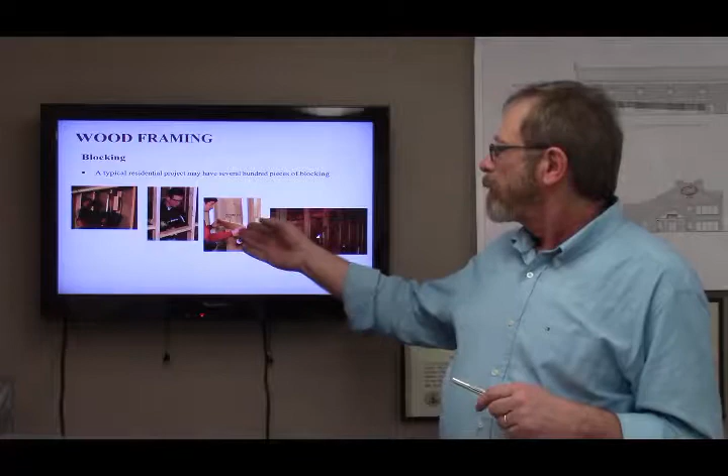In this slide you can see some intermediate blocking for maybe stiffness of the wall or fire stopping purposes here. He's taking a piece of plywood, a large piece, more than probably what is needed for a pedestal sink installation. So he gives himself a good width of space, to make sure that wherever the pedestal sink or the vanity is going to be attached, there's something there.

The next step is the introduction of a plate, a sole or sill plate at the floor where the partition is going to go, and directly above that, the attachment of the top plate to the joist above. If there's no joist there, it simply gets attached to the plywood of the floor up above. And then the introduction of a 2x4, or in the case of an outside wall, a 2x6 stud.

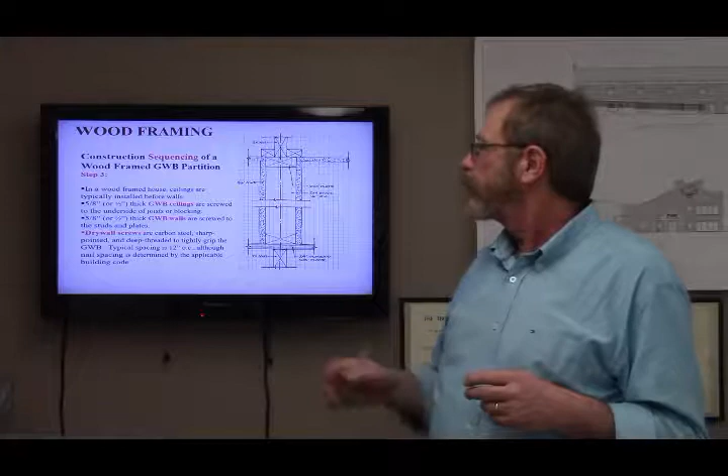So we have now the structural elements of our partition. We now introduce to the face of those studs and plates our piece of gypsum wallboard, GWB. Depending on what our intended use of the wall is, it might be 1/2 inch, 3/4, or 5/8. In this case, showing a 5/8 inch element at the wall, and then to the underside of the floor joist, we are attaching the ceiling gypsum wallboard as well. So we have very roughly the beginnings of an actual detail.

When I talk more about the drawings that are due, and I talk about details, right now we're not a finished detail, right? We're only at a composite. Right now we're only developing a diagram of a detail. So we have some of the elements, we don't have all of the elements of our assembly.

So we have a floor situation beginning to be developed, a cut line because our wall is not here, we don't have enough height here to show a continuous wall, the other cut line, and then the ceiling condition in our space. To that gypsum that we've just seen, we now introduce a floor base on both sides.

In this case it's a wood base, and we are introducing how the wall ceiling condition is going to be. On this side of the wall we have a simple tape and spackle corner, nothing elegant, maybe it's just a closet on that side. On this side, however, maybe it's the dining room, so we want to have a piece of crown molding to make that wall to ceiling connection.

So here we do have a finished assembly. This is now a detail. In fact, this is two details. It says detail, it says detail. Sometimes you're going to see in my PowerPoints that it says diagram. Diagrams are not details. Diagrams are only a small beginning of the development of a detail. But a detail is a composite assembly of everything that's going to go into that particular area or assembly. It's finished, that's it. It's no more to be added to.

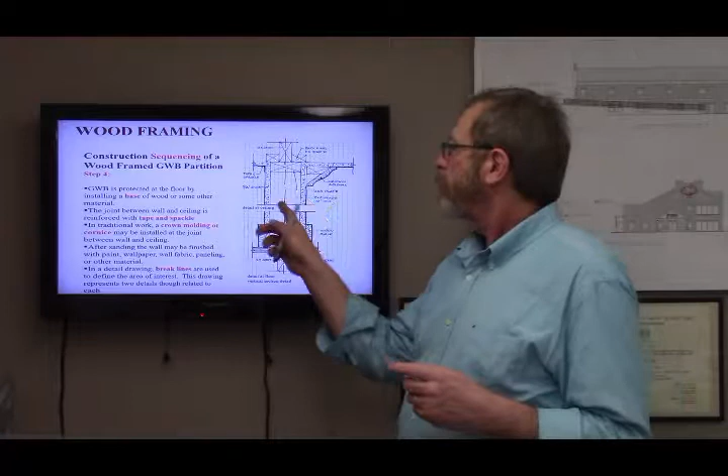So 5/8, a little bigger than 1 square, which they designated as equal to 1/2 inch, and a 2x4 sill plate is actually 1.5 inches by 3.5 inches. They've shown the 1.5 inches as being 3 squares, each square equal to 1/2 inch. We have 2 squares an inch, 2 squares another inch, 2 squares another inch, that's 3, and another square, that's 3.5 inches. For the width we have 3 squares, each representing 1/2 inch, so that's 1.5 inches. We have 1.5 inches by 3.5 inches.

This is on a grid sheet where there are 4 squares to an inch.

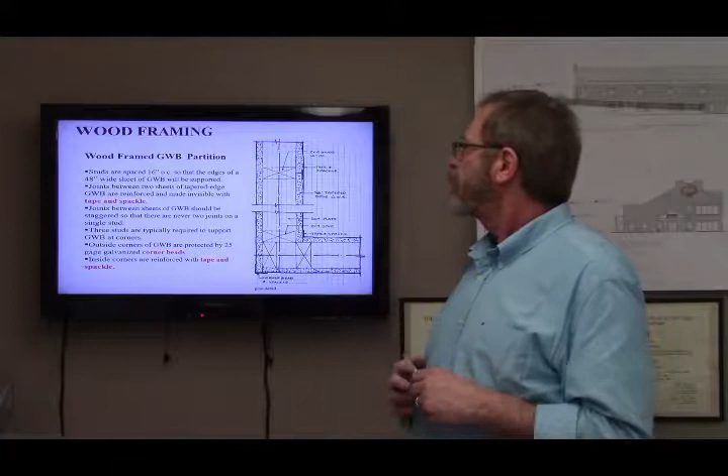Here we have 2 more details. This is a horizontal section through a partition at a corner. We have a typical wall, horizontal detail. You can see the gypsum board on each side, 5/8 inch, a little bigger than one grid square, and a 2x4. We make a note, 16 inches on center to the next 2x4, and we can see here a joint where 2 boards come together, finished with tape and spackle.

We do like to alternate our joints from stud to stud, so we don't have a weak point in this joinery, because sound will travel through those joints if they were to line up. So we like to alternate our joints on a stud, don't have them line up from side to side of that stud.

And then we have a corner condition. We have a 2x4, and another piece of 2x4 to help us form the corner. We have a corner bead on the outside edge that gets spackled so that it's a strong corner, and we have the inside corner simply taped and spackled.

Actually, this is the same wall. It's centered - the red line indicates that it's centered on each other, this detail with that detail. But because of the cut line, we actually have 2 different details. So here's 2 more details that you could actually use for your first drawing submission.

Another 2 details, this time of plaster on wood frame partition - 2 vertical wall details. These walls, instead of gypsum wallboard, show plaster construction. We have the same 2x joist supporting a plywood floor. We have above, the floor above, another 2x joist supporting the floor above with the top plate and the bottom plate, and the stud running every 16 inches on center.

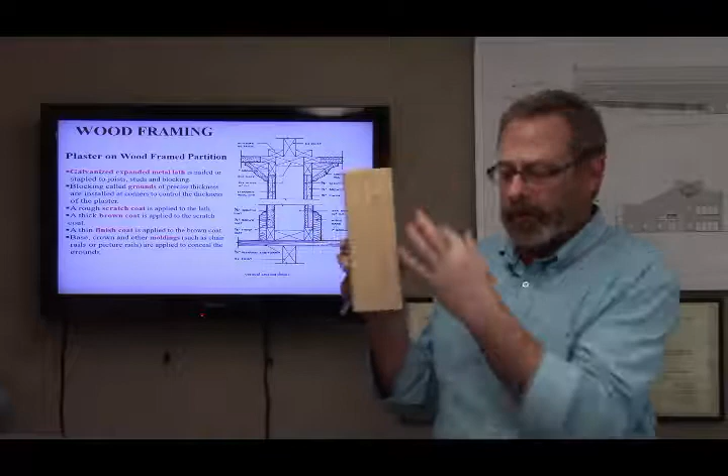Doesn't look like much because we're really just looking at the face of the stud, right? We're not able to mark it with the X as we did where it's at a cut point. It's just the surface, so it's just 4 edges that we're seeing, empty in the center, but we call it 2x4 stud, 16 inches on center. I like to say beyond, because at that point where we're cutting through the wall, that stud may not be right at the surface - it may be a few inches or more back. So I like to say 16 inches on center beyond.

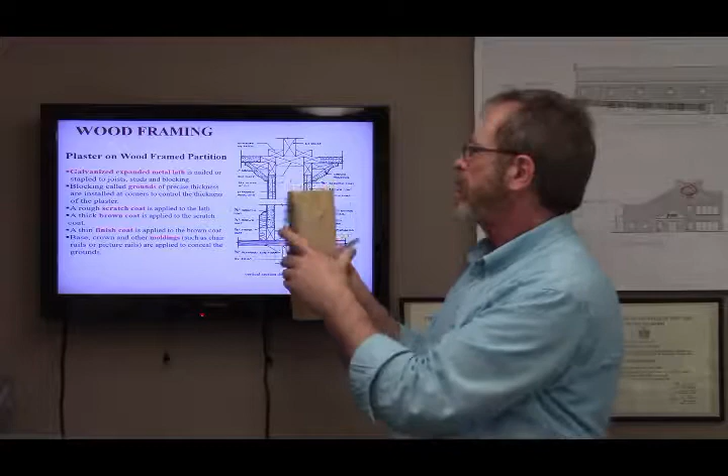Attached to that stud, we have our galvanized metal lath nailed to the stud. Then we have our 3 layers of plaster: this 3/8 inch scratch coat, which penetrates through there to make a key and hold the rest of the plaster on; the next coat being a 1/2 inch brown coat that gives the massing to the plaster wall; and then a 1/8 of an inch finish coat.

So on top of that stud, we're going to cover the grounds - at the base, a piece of wood base with a nice little profile, and at the top, this ground is going to be covered by a crown molding on each side. So we have a vertical section of a plastered wall. At the floor and at the ceiling, we have 2 details for your understanding and use. Thank you.